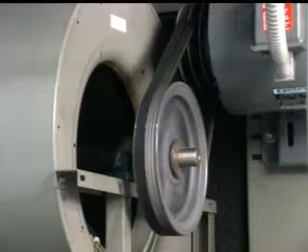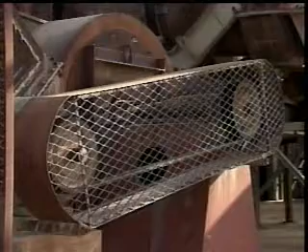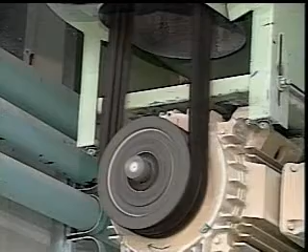www.emerson-ept.com. The V-belt drive is one of industry's most efficient and popular means of power transmission. Properly selected, installed, and maintained, quality V-belts will provide years of reliable service and prolong the life of any motor. The single most important factor in providing optimum operating efficiency is maintaining proper belt tension. Incorrect tension is the most common problem with V-belts.

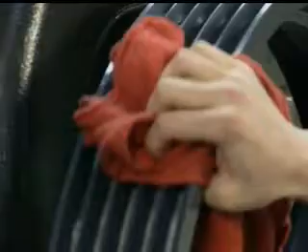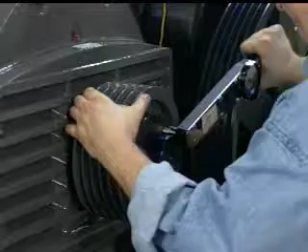This video will cover the fundamental steps to properly maintain your belts and sheaves, as well as instruct you how to check for wear. It will also cover the proper steps for installing new sheaves and belts, setting the proper tension, and how to use a Browning tension checker.

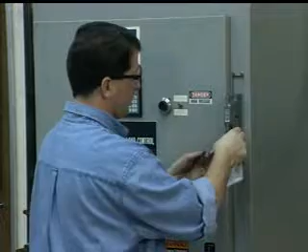First, whenever servicing any type of electrically driven machinery, turn the power off. Lock out and tag the main disconnect of the equipment. Remove the belt guard and clean it thoroughly. Look for these telltale signs of premature belt failure.

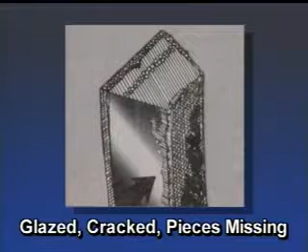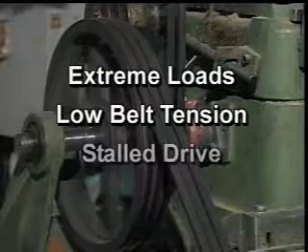If the belt sidewalls are glazed and cracked or have pieces missing, the cause may be too much heat generated by belt slippage. This condition can be caused by extreme loads, low belt tension, a stalled drive, or a poorly designed drive. Consult your Browning drive specialist to help identify the correct solution to your problem.

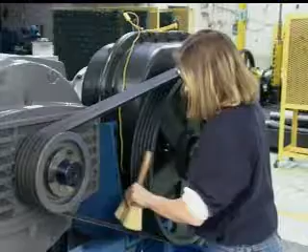You should always keep your V-belts clean. A stiff bristle brush may be used to eliminate any dirt that has accumulated on the belt. Particles of dirt can embed themselves into the belt, making it coarse and rough and causing undue wear on the sheave.

With a simple soap and water solution, we can remove oil and grease from the belt. Oil and grease are enemies of a V-belt. They cause the belt material to soften and swell up, making the belt feel spongy to the touch. Once the physical properties of the belt begin to break down, belt failure is not far behind.

Under no circumstances should you ever use belt dressings. Dressings often have a softening effect on rubber compounds, causing premature belt deterioration. By using belt dressing, you are treating the symptom, not solving the problem.

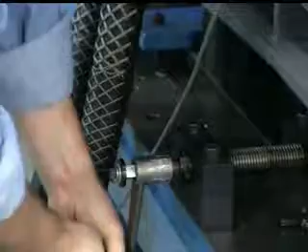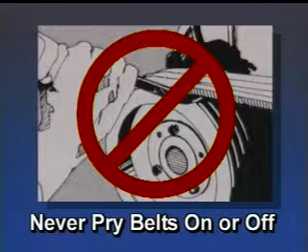During your visual inspection, you have determined that new V-belts are needed. Begin by loosening the motor hold-down bolts and sliding the motor base so you can easily remove the old belts. Never attempt to force or pry belts on or off a drive. This will cause the outer fabric of the belts to crack, or it may rupture the inner cords, resulting in shortened belt life, belt turnover, or belt breakage.

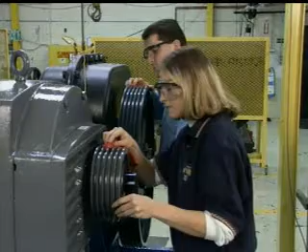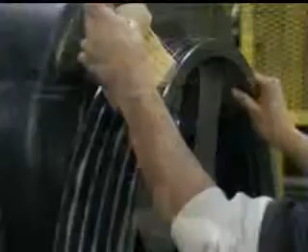Next, visually inspect the sheave for any foreign materials that may be lodged in the groove. These particles could force the belt from its path in the grooves and cause it to turn over, or it can cause groove wear that decreases the life of your sheaves. If cleaning is required, clean the sheave groove with an appropriate cleaning solution and rag or bristle brush.

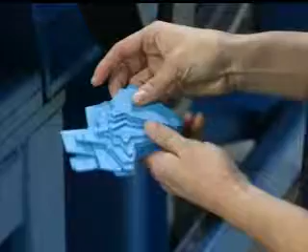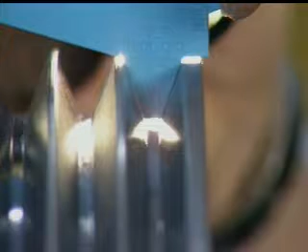Then use the sheave gauge to check for sheave groove wear. Select the proper gauge according to the sheave diameter and insert it into the groove. The gauge rim should rest on the top of the outside diameter of the sheave, and the inside should lie flush against the side walls of the groove.

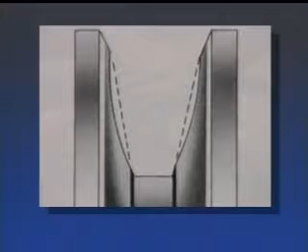On multiple belt drives, be sure to check all the sheave grooves for uniformity. A common pattern for groove wear is one where the side walls of the sheave groove become concave or dished out. This occurs most often in the small sheave. A dishing out that measures more than 1/32 of an inch will cause the belts to lose their wedging action. Another indication of excessive sheave wear is a worn surface on the bottom of the belt and sheave groove. Worn sheaves should be replaced.

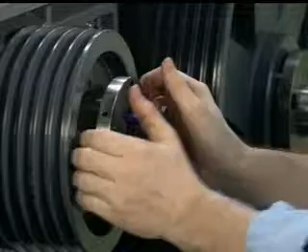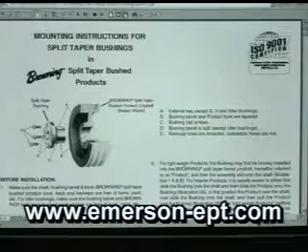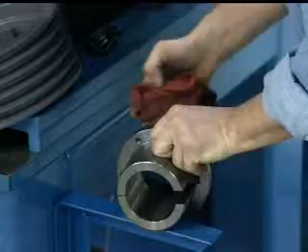Clean any oil, paint, or other contaminants from the sheave bore, bushing tapered barrel, bore, and bushing cap screws prior to installation. When installing sheaves and bushings, always locate the drive as close to the bearings as possible. This will reduce the overhung load and increase bearing life.

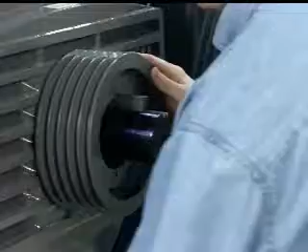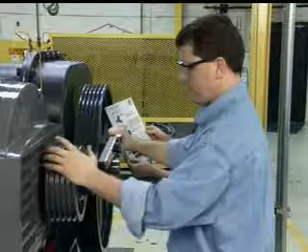Slide the sheaves and bushings on the shaft. Pull the sheave on the barrel of the bushing, aligning the holes as you pull. On lightweight sheaves, you can install the bushing and sheave in combination. Place the bushing in the desired position and torque the cap screws to the values shown on the instruction sheet.

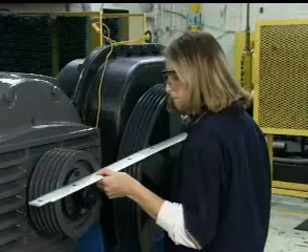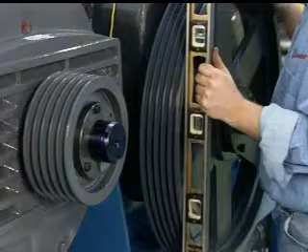Anytime you make a change in the distance between the two shafts, it is imperative that alignment be rechecked. The easiest and most common method of determining sheave alignment is with a straight edge. Simply place the straight edge across the outside edges of the two sheaves. The straight edge should be making contact at two distinct points along the outside perimeter of both sheaves. On horizontal drives, use a level to check for angular misalignment. It is essential that both sheaves are in the same vertical plane and the belts are not twisted.

With the new sheaves installed, proceed to the installation of the new belts. It is critical that you install the correct belts. Be sure that all belt replacements are a match set. Belts from Browning marked Code 1 are a match set. We can provide machine-matched belts to closer tolerances if requested.

Never replace just one belt in a set, and never use new belts and used belts together on a drive. It is also recommended that you never mix belts from different manufacturers. They may have different length and cord placements, and mixing them could result in much shorter belt life. Staying with one manufacturer will make identification and selection of belts much easier and result in better drive performance.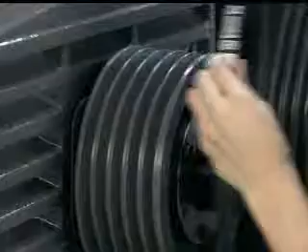Take the properly marked and matched set of belts and place them one at a time over the sheave grooves. Be sure the motor mount is sufficiently loosened so no undue force is needed to place the belts over the sheaves. Hand adjust the belt so that all the slack is on the same side, usually the underside. Tighten the belts by increasing the distance between the shafts until both spans of the belt are snug.

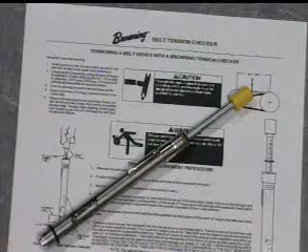Now you are ready to adjust the tension for the new set of belts. The best method to check V-belt tension is with a Browning tension checker. Use it when you install the new belts and use it again 24 hours later. This ensures that the tension remains accurate. Always use the manufacturer's guides and tables when using this valuable tool.

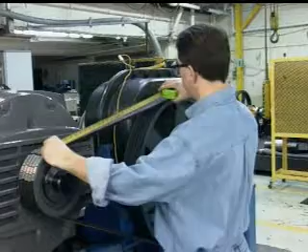With the motor off, locked out, and tagged, begin by measuring the span length where the belts enter the sheaves. In this example, the span length is 30 inches. Using that 30-inch measurement, we set the large O-ring on the tension checker at 30, the deflection, and set the small O-ring at 0 to measure the deflection force.

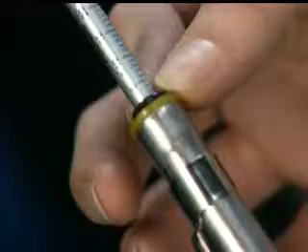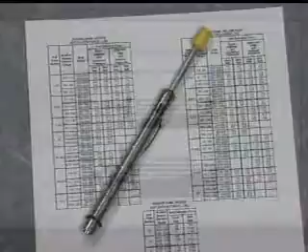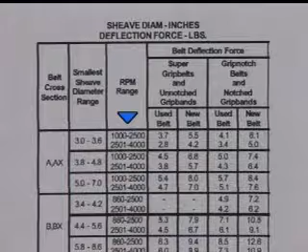Deflection force is the amount of force in pounds that it would take to deflect the sample belt. You can find this information on the Browning tension checker instruction sheet or on our drive printout from the website. To find the correct tension value, locate the belt cross-section, the diameter of the small sheave, the RPM range of the small sheave, and then follow across the page to the correct belt type for a new belt.

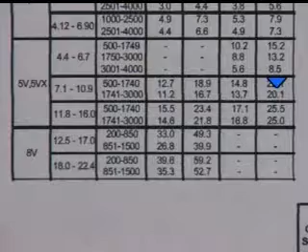Here we can see that 20.1 pounds of force per belt is required. When using the edge printout, multiply the minimum tension by 1.5 for initial new belt startup.

Place the large end of the Browning tension checker at the center of the belt span. Press down until the bottom of the large O-ring is even with the top of the adjacent belt. The small O-ring should now read 20.1 pounds. Now reset the small O-ring at 0 and repeat the process on each of the other belts.

Remember, it should be standard procedure to check the sheave alignment after any adjustment in the distance between the shafts. Run the drive for 15 to 20 minutes. This will give the belts time to seat themselves in the sheave grooves. Then recheck the belts to ensure minimum belt tension has been maintained.

Over-tensioned belts can be just as much a problem as under-tensioned belts. Belts that run too tight put too much strain on the drive, causing the bearings to overheat. Each belt should ride consistently in the sheave groove from one belt to the next.

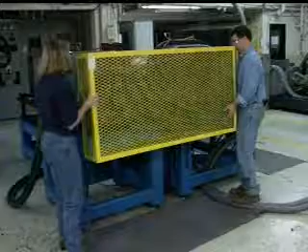When you have correctly installed the new belts, properly set the tension, and realigned the sheaves, you are now ready to reinstall the belt guard. This is a good time to apply your Browning drive label for future part identification.

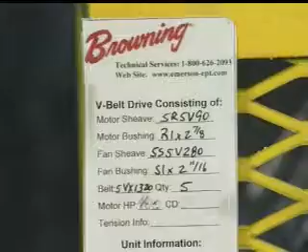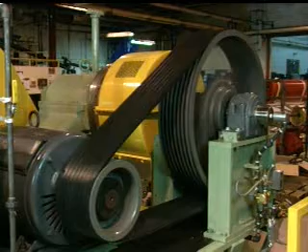Drives that have longer spans, excessive vibration, or pulsating loads may have problems with individual V-belts turning over or jumping off the drive. This is referred to as belt whip. Banded belts are used in these circumstances to dampen the vibration, reducing belt whip, and eliminating belt turnover.

One last point that will add life to your drive belts. Occasionally it may be necessary to shut down a drive for an extended period of time. It is highly recommended that the tension of the belts be relaxed during this period. This simple procedure prevents the belt from stiffening and hardening and losing its strength. When returning the drive back into operation, be sure to retension the belts and realign the sheaves.

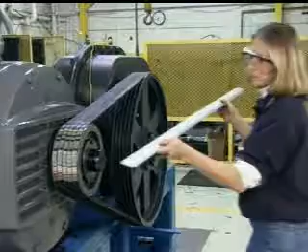In review, as part of your regular maintenance, clean your belts and sheaves and check them for wear. When installing new sheaves, always remove the oil from the sheave and bushing. Be sure your new belts are a matched set from the same manufacturer and never mix old belts with new.

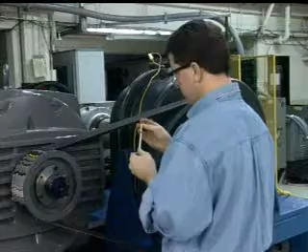Most importantly, take the time to accurately set the tension of your new belts using the Browning Tension Checker. Always recheck the sheave alignment anytime you change the distance between sheaves. Properly installed and maintained, your Browning belts will deliver the superior performance for which they were designed.